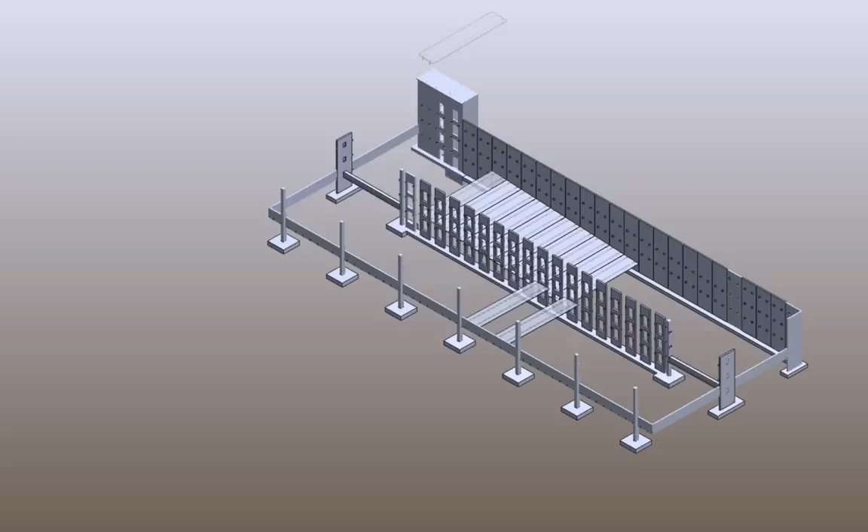With the latest release of the 64-bit version of StructureWorks, we not only can do it, we have done it, and here's the proof. 2 drafters produced this 3D model, a complete set of shop drawings, piece details, and all related bills of materials in just 1 week. They started with a library of standard piece templates and connections. Then, in 6 days, or 108 man-hours, they completed a 400-car parking structure consisting of 256 pieces, 76 mark numbers, 13 sheets of erection drawings, and 36 connection detail drawings.

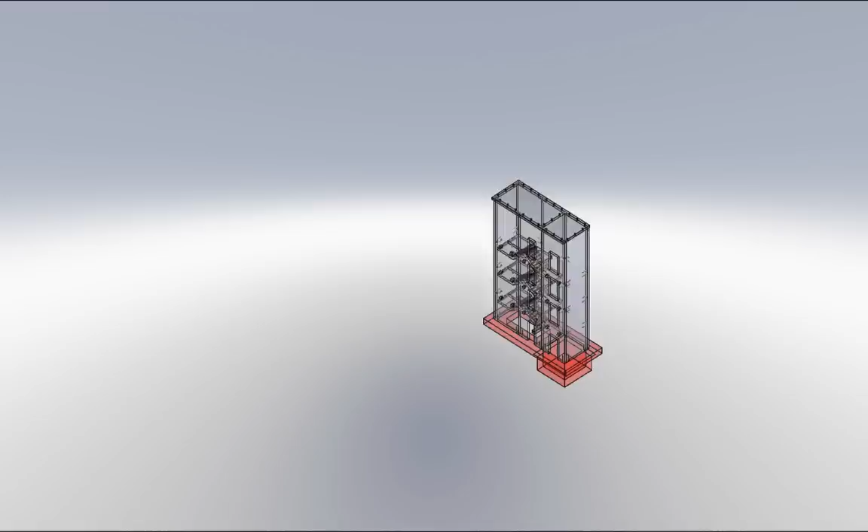The purpose of this demonstration is to highlight the significant competitive advantages StructureWorks can bring to your organization. Obviously, no design software can remove all the variables associated with an entire project, such as waiting for information from owners, designers, contractors, government, etc. Our aim is to demonstrate how StructureWorks can leverage your organization's knowledge of the vast amounts of information that are standard of the structures you design and allow you to take pre-designed templates and drawings and quickly customize them to the exact specifications your customers require.

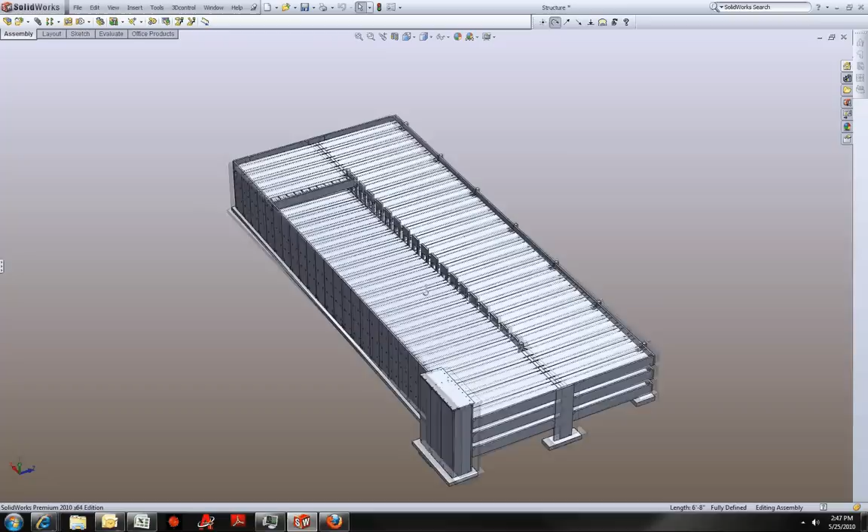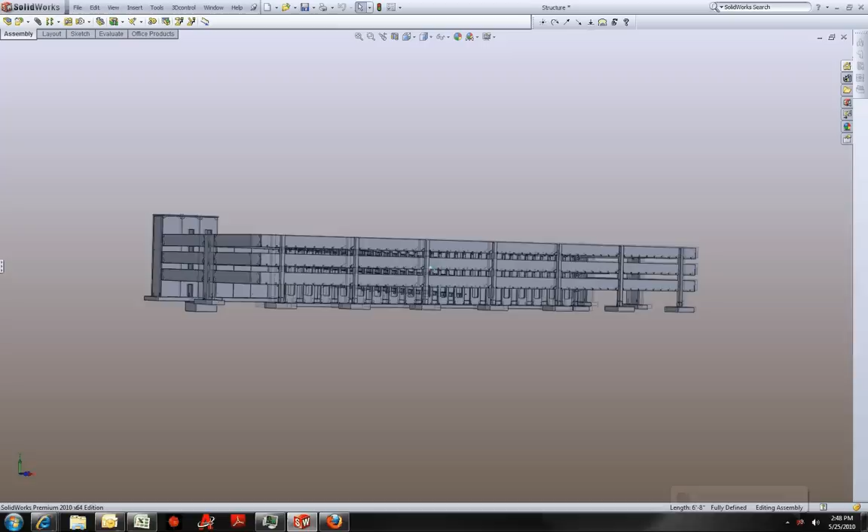While not the most elaborate model, you can easily verify that it contains all the basic components of a modern parking structure. As each piece of this model was changed from the base template to meet job-specific standards, all of the related drawings were automatically updated and generated. This process enables the drawing to be like a report generated from the model rather than the user creating entirely new drawings. Please follow along as we describe how this impressive software allowed these activities to be accomplished in a week. We anticipate that you will recognize many benefits your organization would gain by using StructureWorks.

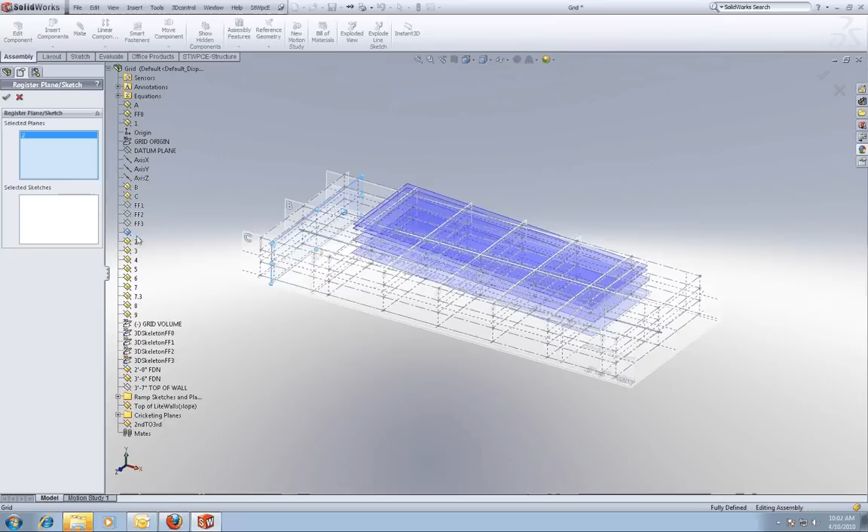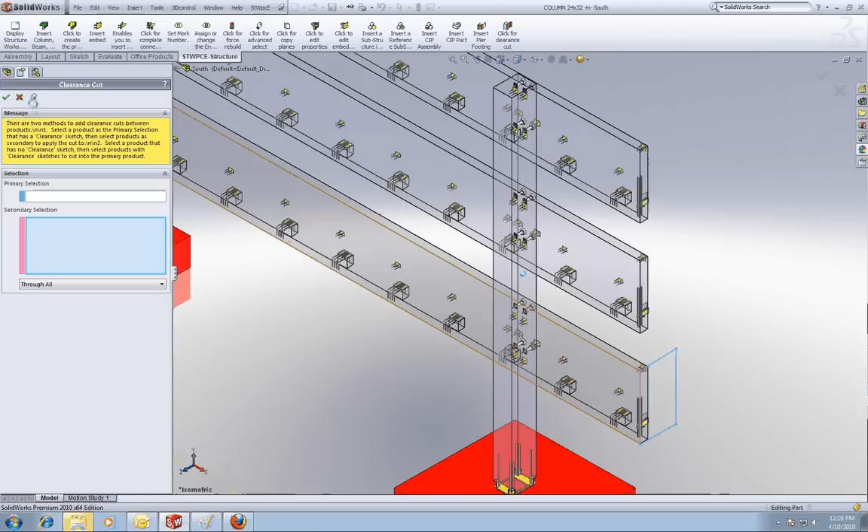The project is started by setting up a grid system which allows the user to control the geometry of the building, including, for example, column placement, floor-to-floor heights, and floor slopes for drainage or parking ramps. Next, precast components are added to the building using standard template products from the library, which contains the most common standard plates, lifting hardware, and reinforcing. Each piece is then modified to suit specific requirements of the project. Non-standard products are added as needed at this time.

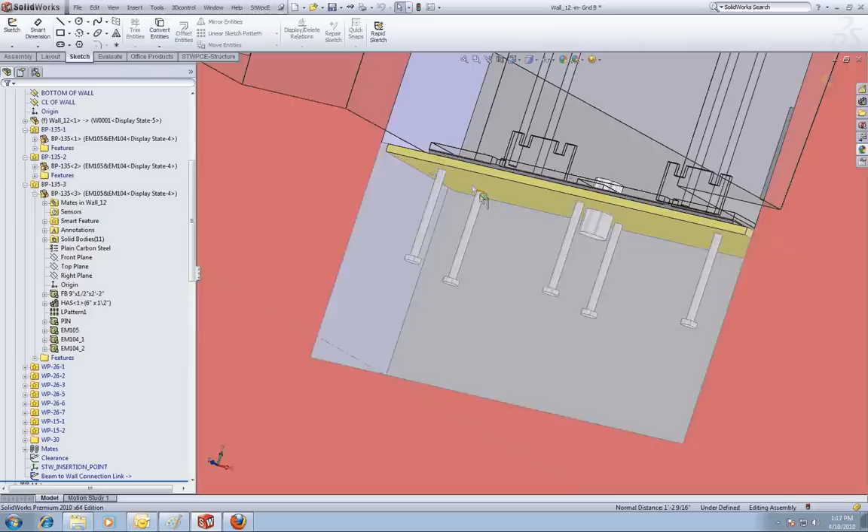Then, connections are added. If both plates already exist in each of the pieces to be connected, the user simply completes the connection by adding the erection material with the StructureWorks connection tool. If one or both plates are missing, the connection tool is used to insert the plate into the precast component and complete the connection. After connections, the mark numbers are added to all pieces in the model.

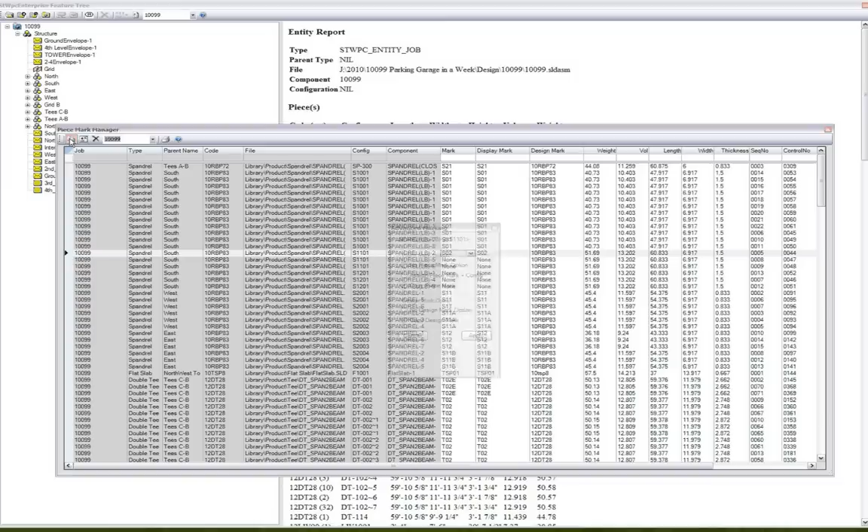To begin the process, the user marks the first piece and the system then automatically marks identical pieces with the same mark number. Furthermore, the system will not allow the user to mark 2 dissimilar products with the same mark number. The user then continues applying mark numbers to unmarked pieces and allowing the system to mark the identical pieces until all pieces have been marked. Lastly, the user creates the erection drawings and piece details.

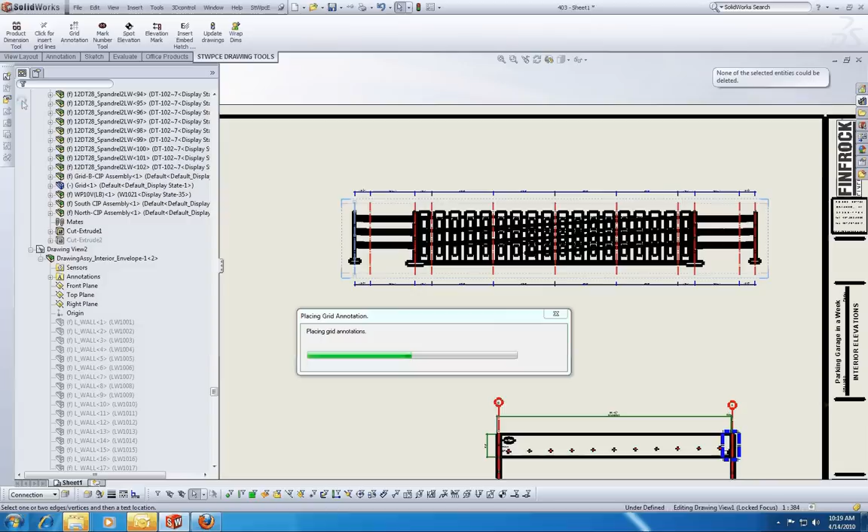Erection drawings are fairly straightforward. StructureWorks tracks erection drawings and stores information such as sheet number and title, job info, drafter, engineer, etc. Elevations and plans are created using assemblies called drawing assemblies. These are small assemblies of the components that make up the elevations and plans. There are also several StructureWorks tools to add mark numbers, grid lines, grid bubbles, piece dimensions, and various other annotations.

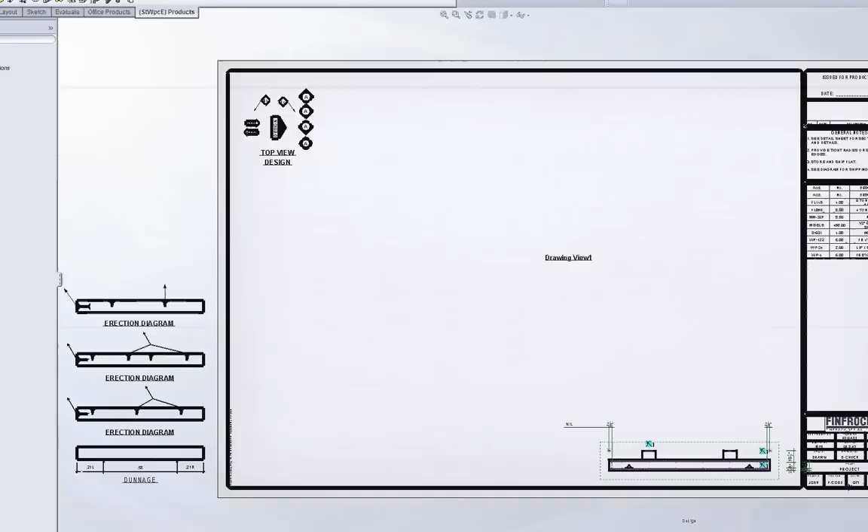Piece details can be created from scratch or cloned from an existing file. Once the first drawing of a series has been created, all remaining drawings can be cloned quickly. For a simple product with many mark numbers yet minor variations, the user may only need to open the drawing to ensure the BOM and dimensions have updated and then print the drawing. Even in the most complex products, which may require more input, 75% or more of the drawing is complete before the user begins making any modifications.

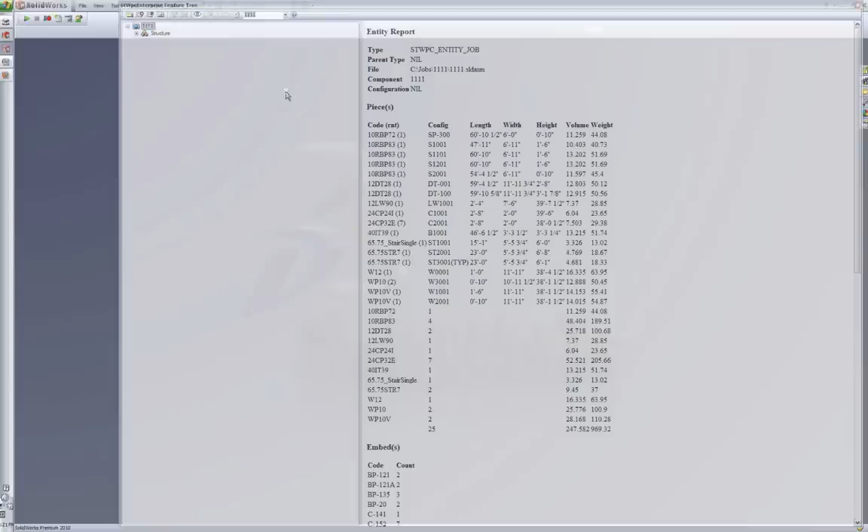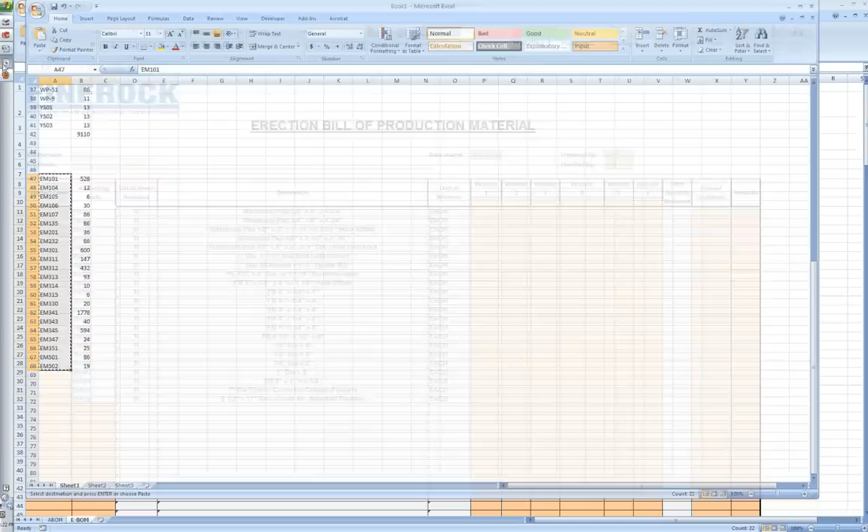StructureWorks will create an advanced bill of materials and erection bill of materials on the fly. As the user adds connections to any piece, it is updated in the StructureWorks database and can be exported to Excel as well as other standard databases.

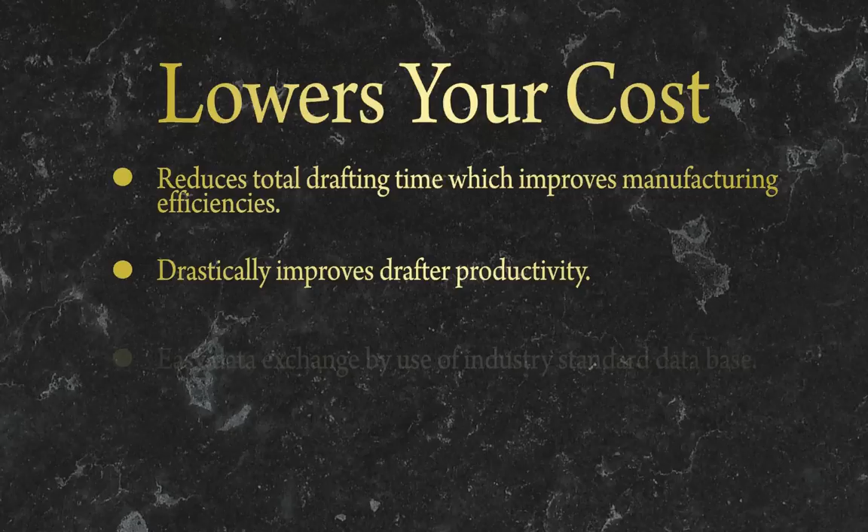StructureWorks lowers your cost by reducing your total drafting time, which results in improved manufacturing efficiencies. Your drafters' productivity will drastically improve. The use of an industry-standard database makes for easy data exchange and the creation of template libraries. StructureWorks reduces your risk because it uses a worldwide standard 3D modeling package. It receives continuous input from industry experts and so provides you with fewer manufacturing and installation errors.

StructureWorks improves your competitive position because it empowers you with faster-to-market delivery, which improves your customers' return on investment and provides complete BIM-compliant structural information to your customers.